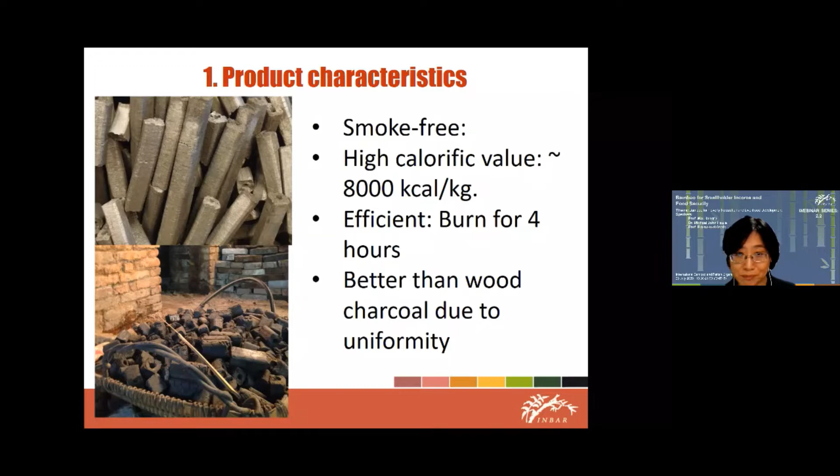Another source of raw material came from the secondary grade culms harvested from managed moso bamboo forest. The first grade culms were sent to pre-processing factories for end product processing, and the secondary ones were sent to charcoal factories or pulp making factories.

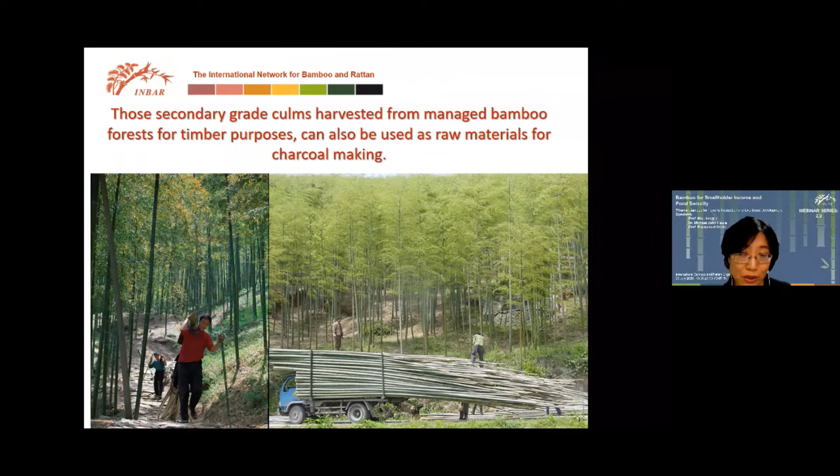So this is the process. First, we need to make all the raw material uniform in the same granule size. So first we do crushing and smashing, and then we got qualified bamboo powder, and then we further grind them and screen them, because there's some other stuff like sand and dirt mixed with the bamboo, so we need to screen them. Then after that, we do drying. There's a special drying machine, and then shaping.

This shaping is kind of an extruder. I will show you the picture. So the first picture I'm showing here is the...

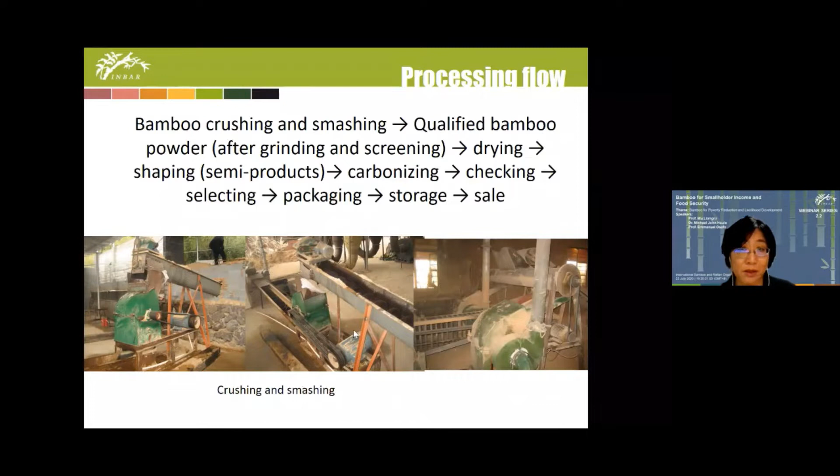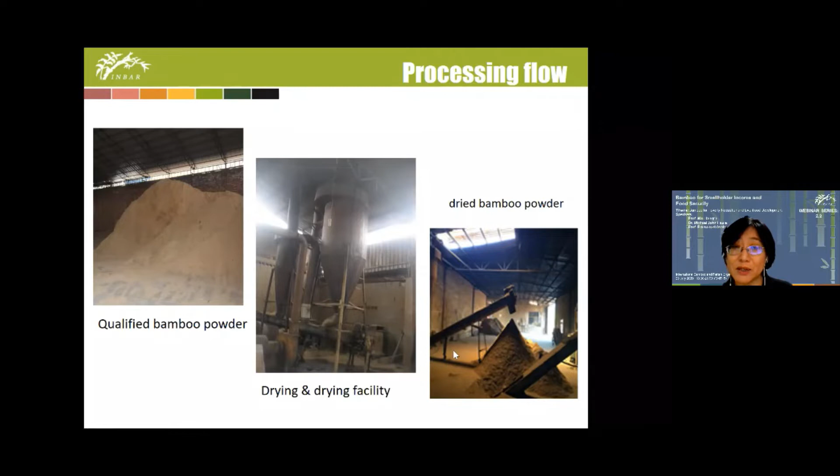crushing and smashing machine. Now you see there's a garage in the factory to store the powder, and this is the drying facility. After dried, the materials become like this, and they must be immediately put into the shaping machine. This is the shaping machine.

Basically, this technology is developed by Anji County according to their own conditions, and therefore this is a special machine. Of course, now this machine has been used in other provinces, but it's still managed by Anji people.

So you see this charcoal making, briquette charcoal making, the processing is quite different from others. The briquette is made before carbonizing rather than after carbonizing.

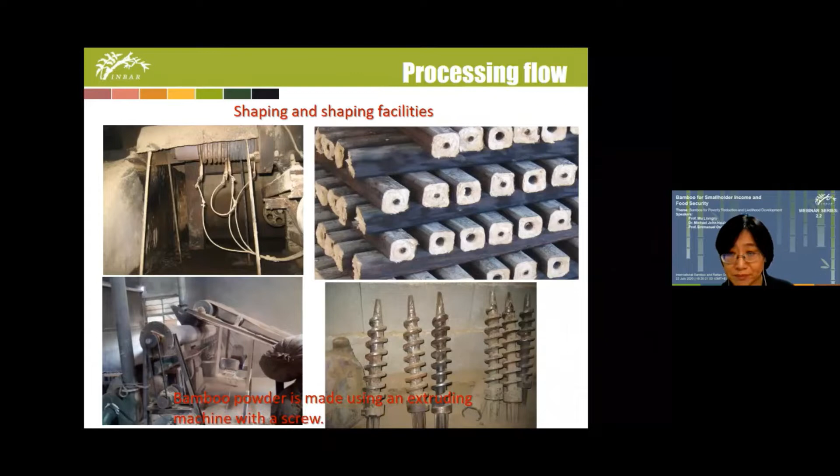So after the extruding machine, the briquettes then go to the carbonizer. Anji people prefer brick kilns, and this picture shows chained brick kilns. It's very long. This is a big production.

This kind of chained brick kiln can make sure the uniformity of the heat inside, so you can burn many charcoals at one time at the same pressure and same temperature at the same time. This saves costs and could make your products of higher quality and be profitable. So you see at the ceiling part, the ceiling is dome-like.

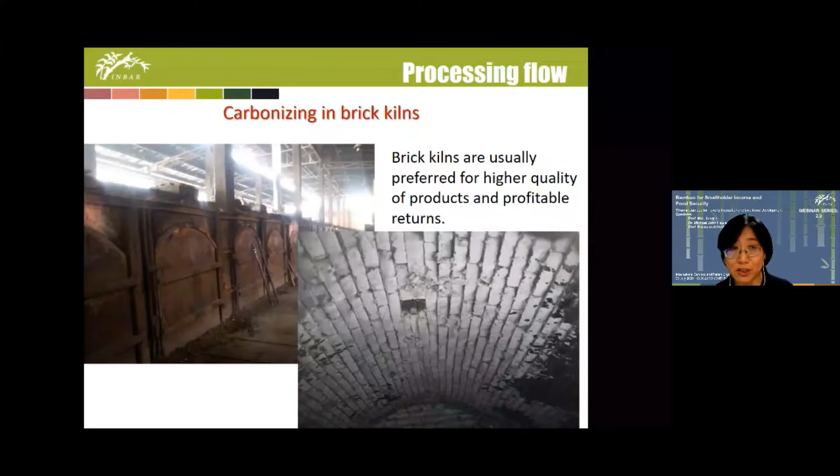There is a hole, and this hole is for the technician to observe the smoke coming out of the kiln, and then to decide when is the time to open the kiln, and what stage the carbonizing process has reached. So before you establish the project, you need to have a very experienced technician.

And the next step is cooling down. This picture just shows it's still burning, but it's better that the charcoal should be cooling down in the kiln rather than taking it out. So this picture is just to draw it out to let you see them.

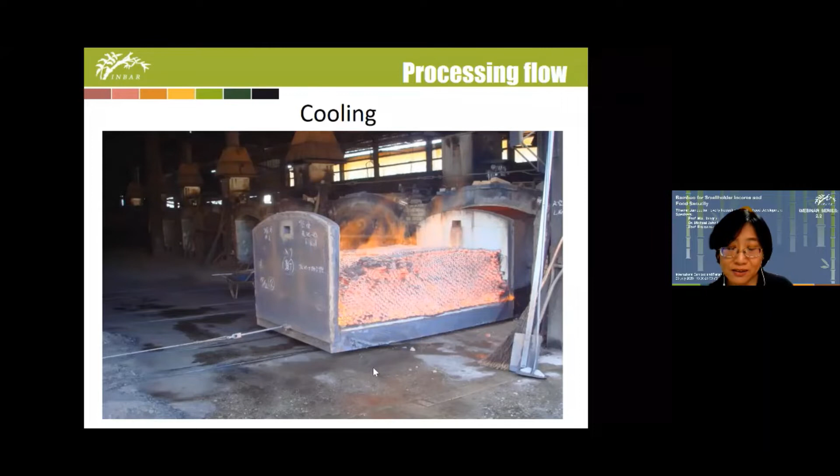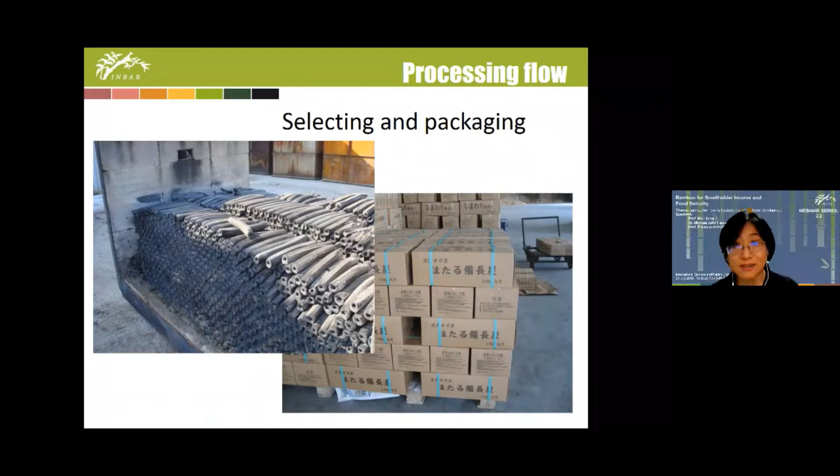So they need probably several days to cool down in the kiln itself, and you must avoid moisture. This is before packaging, and then you select and then pack. And then this goes to the container.

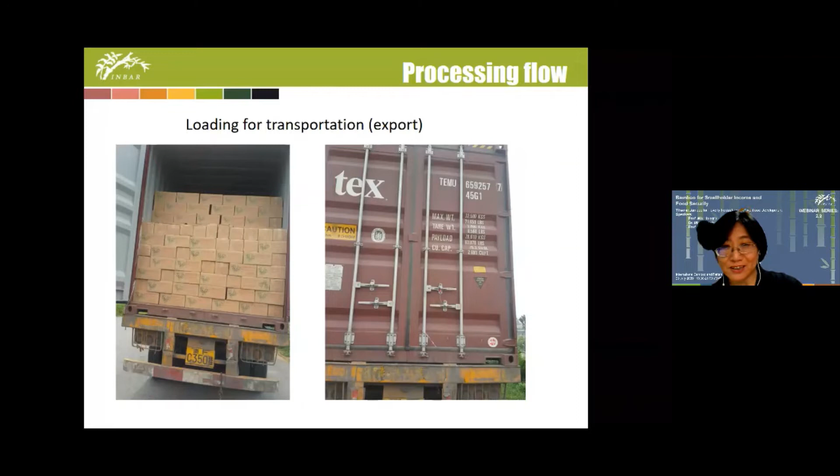So in Anji, each briquette charcoal making factory each day can produce 1 container. But it's not like that literally—the chained kiln will burn for 2 weeks, so it's just an average of 1 container per day, but actually it goes in cycles every 2 weeks. So this is the equipment list. This is only the key equipment.

You should have other auxiliary equipment for these products. First is the mill to do grinding, crushing, screening, and the drying and shaping equipment. The carbonization, what I said just now, is the kiln, and some auxiliary product recovery devices.

That means to keep the machines running, that's for debugging, this kind of devices. Then byproduct recycling devices means the bamboo vinegar. Bamboo vinegar is...

distillation of the bamboo charcoal coal tar. When you burn charcoal, there is a kind of coal tar condensed in the chimney, and a kind of oily liquid comes out. If you distill it, you get a special kind of chemical called vinegar, but this is not edible. This is for chemical factories, for daily chemical factories. They could be used for herbicide, pesticide, fertilizers, or cleansing chemicals.

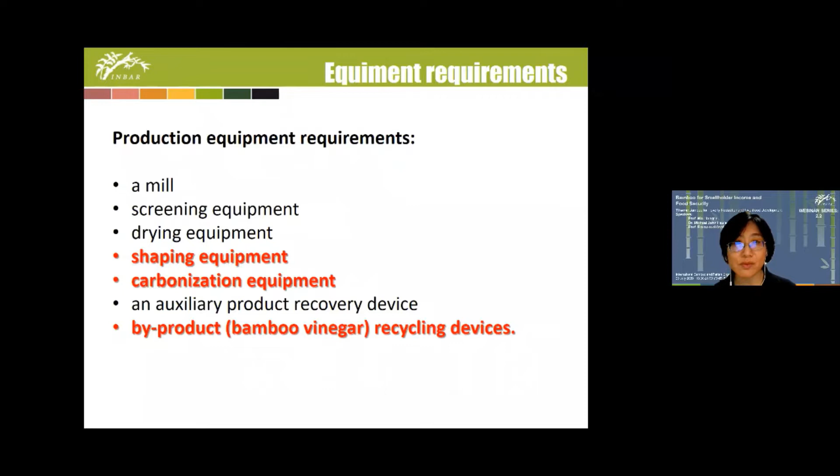And here is a calculation. This data was collected in 2015, so now, 5 years later, the situation is quite different in Anji. Actually, this kind of charcoal factory no longer exists in Anji—they were moved to west of China.

So the annual output is 3,000 tons—that means annual production is 3,000 tons of charcoal. And then the raw material to final product ratio is 6 to 1. So this raw material means fresh bamboo material that gets to the factory, meaning 6 tons of raw material can produce 1 ton of charcoal.

So that means the annual requirement for raw material is 18,000 tons. It goes to about 60 tons per day—60 tons per day. Equipment investment—this is only investment for equipment.

2.1 million yuan, which by exchange rate is about 300,000 US dollars. This does not include costs for renting the land, for the buildings, and for organizing production. For this size of production you need 40 employees, including 4 charcoal technicians. So the total sales revenue is 13.2 million yuan, about 1.9 million US dollars, and the profit is 1.2 million yuan, around 180,000 US dollars. We calculated that the recovery period, meaning when you can claim back the costs, is 6 years.

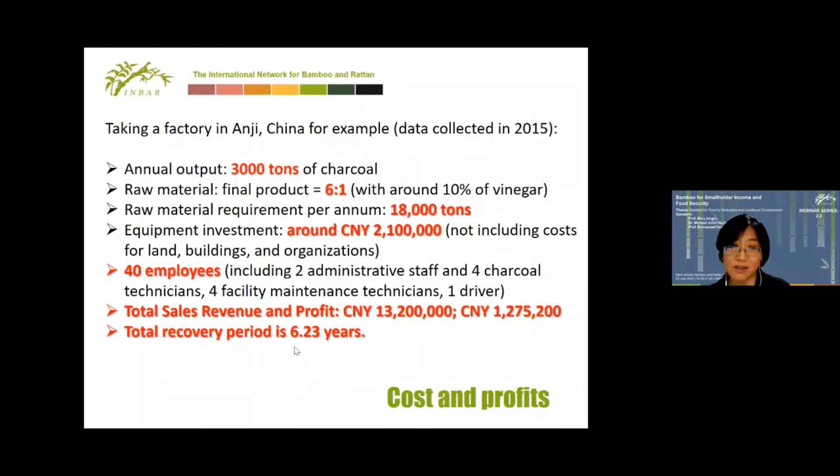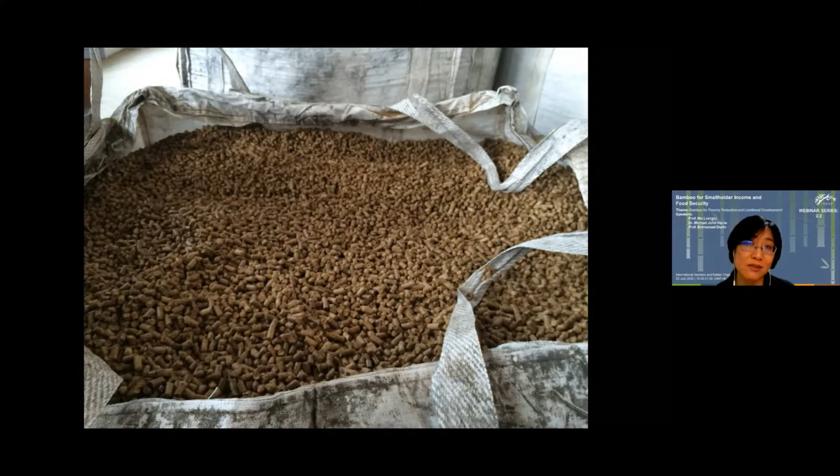So the next production unit is biomass pellet. This project we are introducing to you is unique in Anji County because this special technology was not used by other companies in China or in the world. It belongs to only one company, and this project was developed by the company together with the support of the government of Anji for 10 years.

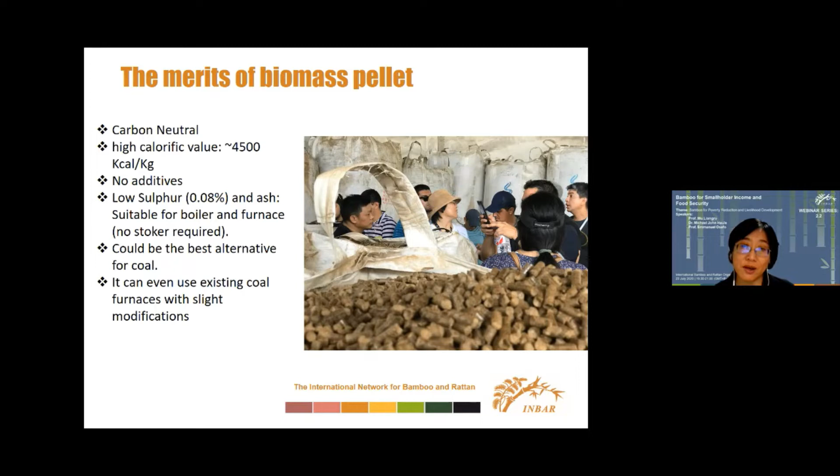Let's look at the product quality. It's carbon neutral, and it has a high calorific value of 4,500 kilocalories per kg, so it could be a very good replacement for coal. This fuel can be used for boilers and for power generation. Note there are no additives, no glues or other things for ignition — nothing else. This is purely made of bamboo. It has very low sulfur, and if you burn it, it generates very low sulfur and very low ash content, so it does not wear off the furnace or the boiler. It also has an automatic feeding system, so no stoker is needed. It could be the best alternative for coal, and it can use existing coal furnaces.

You can see this processing flow is quite simpler than that of charcoal. What's not simple is the technology itself, but the process is very simple: you directly use the raw materials, pulverize it, dry it, form it, then package and ship out.

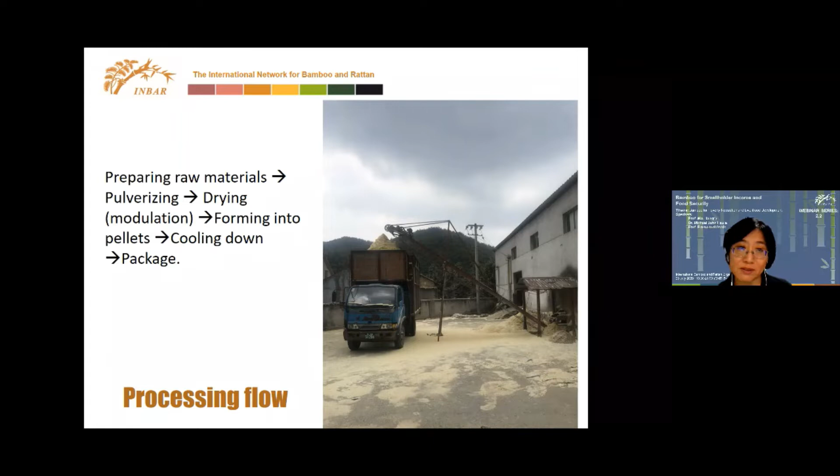You could see that the raw materials requirement is very high, so this factory doesn't even have a space for the raw materials — they have to be piled outside of the factory. You can use sawdust or use the raw raw materials.

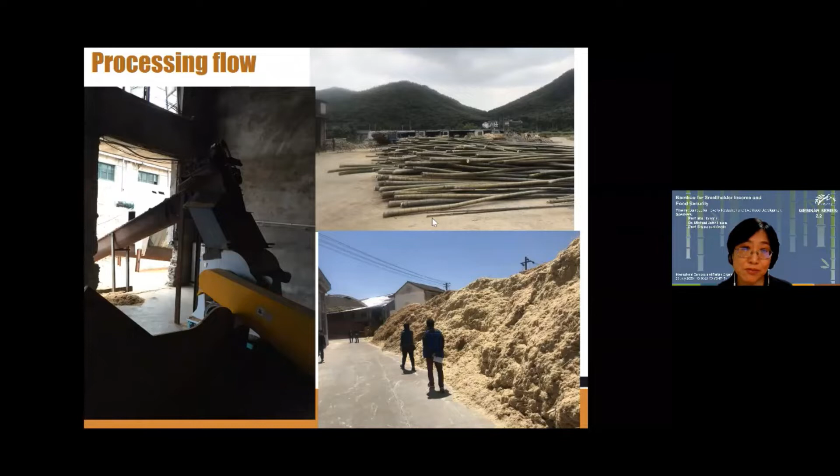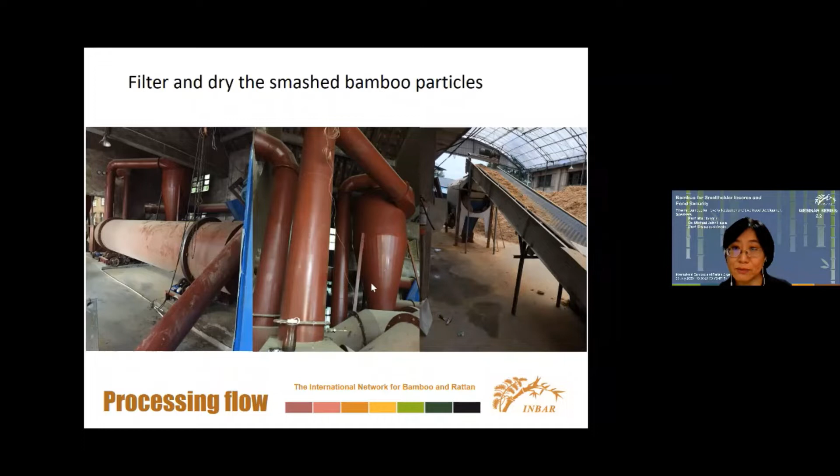You must first crush and smash them into particles, and then this is the drying facility — the drying cylinder, and this is also a drying machine. This is the transportation; after drying and screening, you get this.

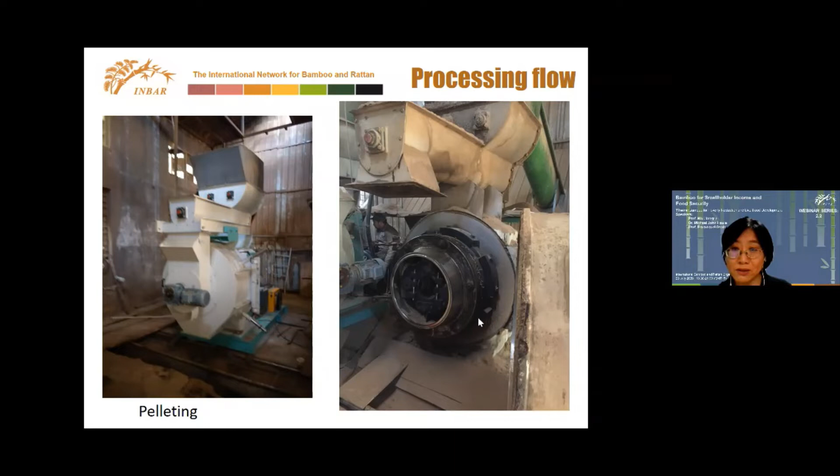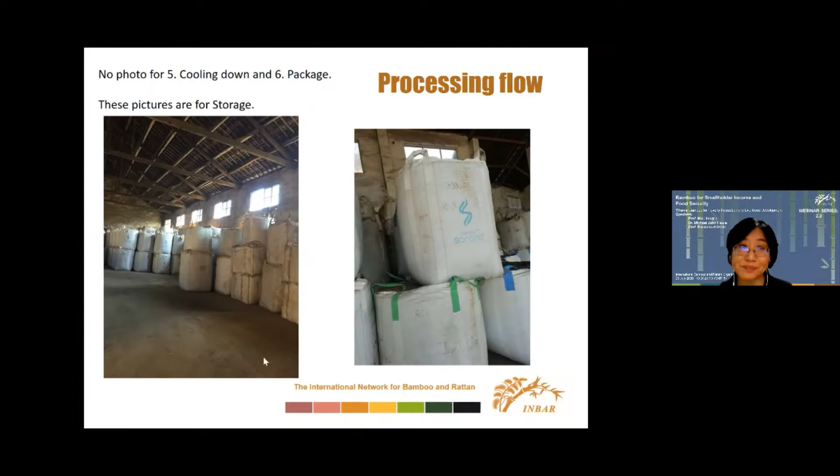So this is the core part — this is the pelletizer. When it's closed, and when it's opened, you could see the core part here. Let's have a closer look. Now our pellet comes out of these holes, and this is the final product. This is how you package, store, and then ship it out.

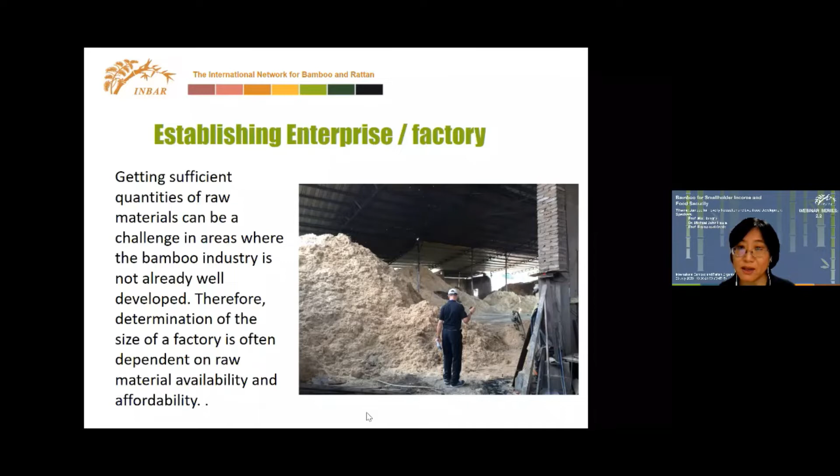So the difficult part is to plan and to establish such a factory or develop such a project. One key issue you must consider before establishing such a factory is that you must have sufficient raw material supply — not only sufficient but regular. This could be a challenge for areas where the bamboo industry is not well developed, so this is a key issue before your decision making.

The next several things you need to do before setting up such a project: first, with experts, investigate the local bamboo resources, the local existing processing industry, and the market condition. We also prefer that the local area already has a bamboo development plan which can accommodate this bamboo pelleting factory as part of it, maybe as the primary development part.

If not, we need to have a well-elaborated project plan for the pelleting machine. At the initial stage of implementation, we should have training for the technicians and management people. When the machine arrives, we should also have technical consultancy on the machine.

So I suggest that if you want to transfer this technology and introduce the equipment from China, you'd better choose to have a packaged service. That means we will help you plan the project, help do the training, ship the machine, and help with consultancy during the trial production period. This will make sure the project will not go off track and all problems could be resolved.

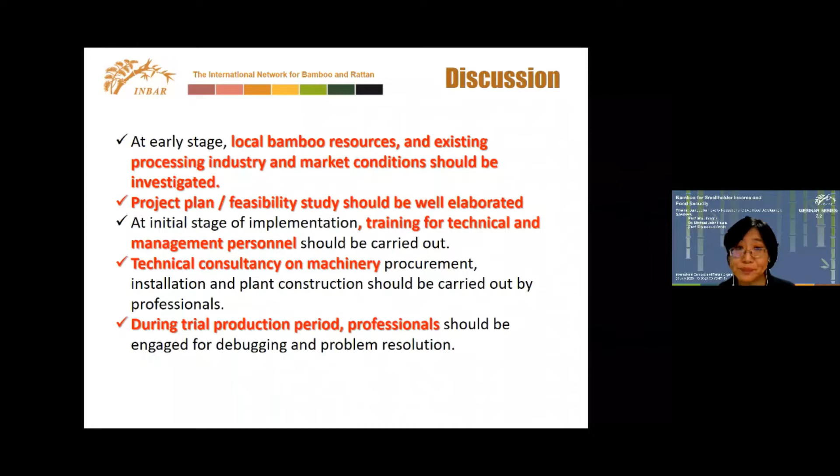Next, I would like to ask Mr. Xuan Tao to say something about their investigation into the market and the potential for the bamboo biomass pellet product. Thank you.

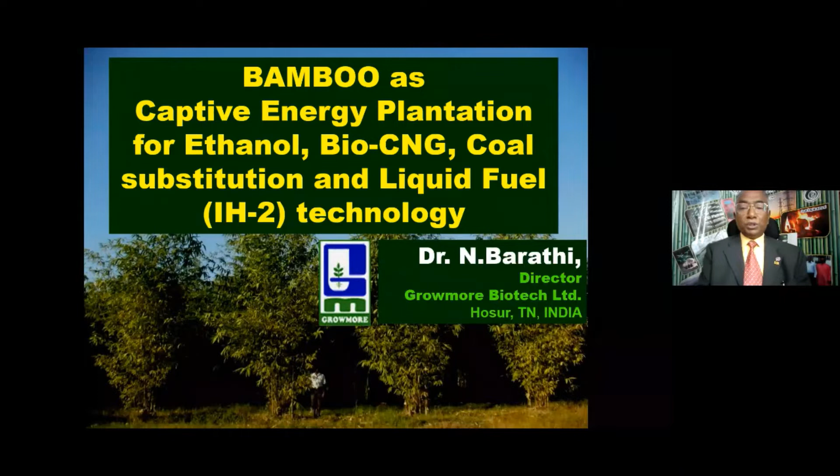I'll be talking on bamboo as a captive energy plantation for the production of ethanol, bio-CNG, coal substitution, and liquid fuel through IH2 technology. These are all renewable resources that can reduce global warming in a great way. I'll be talking on three topics: one is how bamboo is suitable for bioenergy, the next is what different energy products are being trialed and validated now, and the third is what are the constraints and opportunities available.

Let's take a look at how it's suitable. Bamboo burns very well, but normally bamboo is used as a high value product. Today, when bamboo is used as a product, it's sold at $1,500 per ton, whereas for energy it should be only $60. So the value of the bamboo should be low enough to convert into energy.

You cannot rely only on waste material, but bamboo is burnable. It has an excellent amount of carbon content - 48 to 52% is carbon sequestered from the atmosphere. Over and above that, it has fermentable sugar - 65% fermentable sugar of cellulose and hemicellulose - and that's what gets converted into ethanol or bio-CNG gas. It also has an energy value as such without doing anything: 4,000 kilocalories. What's very interesting is 1% ash content in that. Normally, when you look at coal, ash content varies from 10%, 15%, 20%, up to 30%. This is the one with the least amount.

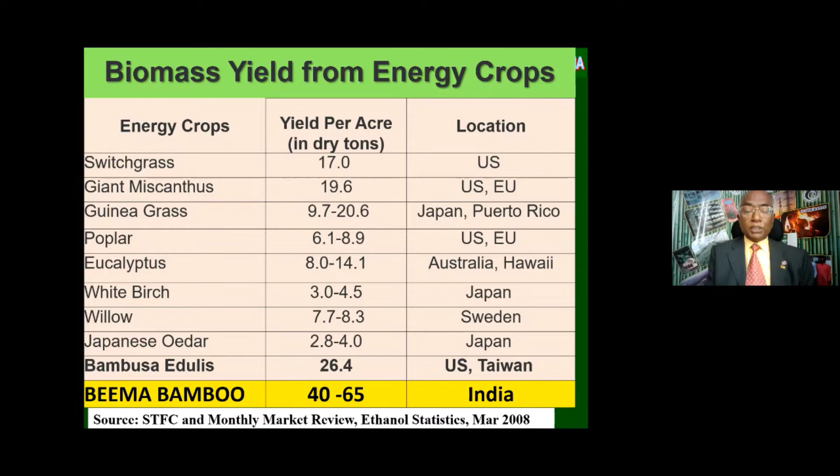What happened in India - I could see a case history where the cost of the biomass was only 800 rupees a ton around 8 years back. Everybody went for energy through bamboo biomass, then it went up to 2,500, 3,500, and now it's sitting at 4,500 rupees. But at this cost, we cannot make energy out of the bamboo.

So what we did, we made it deliver the technology by which we can do this and reduce the cost to 1,500 rupees a ton. And that's where the bamboos come into picture. Bamboo, when you do it as a captive energy plantation, every factory, if they're going to grow on their own, that cost is only 1,500 rupees, hardly around $25 per ton.

And the bamboo, when you look at this, their moisture content is 12 to 15% when it is dry. Ash content is only 0.4 to 1%. Volatile matter is excellent for burning, and the fixed carbon is low. The sulfur is least, and the calorific value is 4,050 calories.

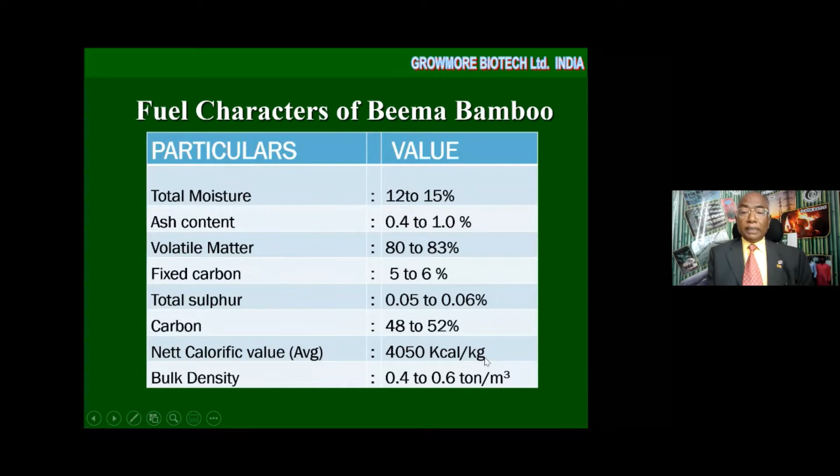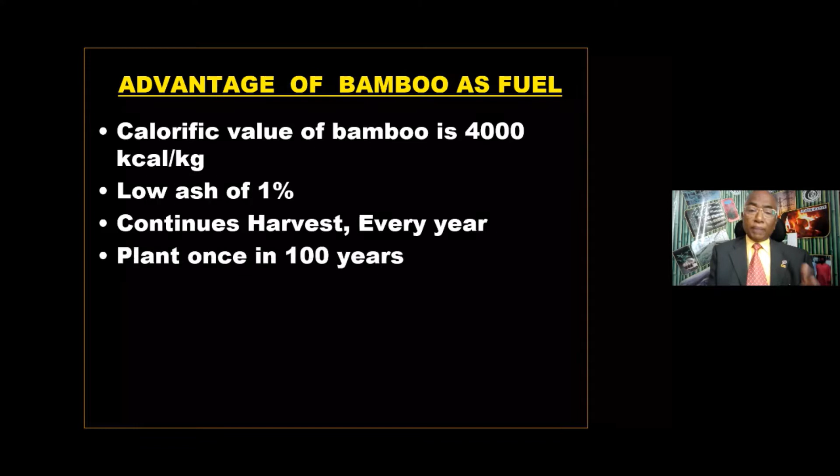Then the bamboo has got several advantages as a fuel: high calorie value, low ash content, and can be continuously harvested. Once planted, it can grow for several hundred years. If the bamboo is sterile, species like Bambusa balcooa and Bambusa vulgaris can be continuously grown without replanting - planted once in 100 years, it can keep on growing forever. All other energy crops need to be replaced at a particular time. Bamboo is a grass, because of which the tar content is very low, which is one of the interferences in most boilers.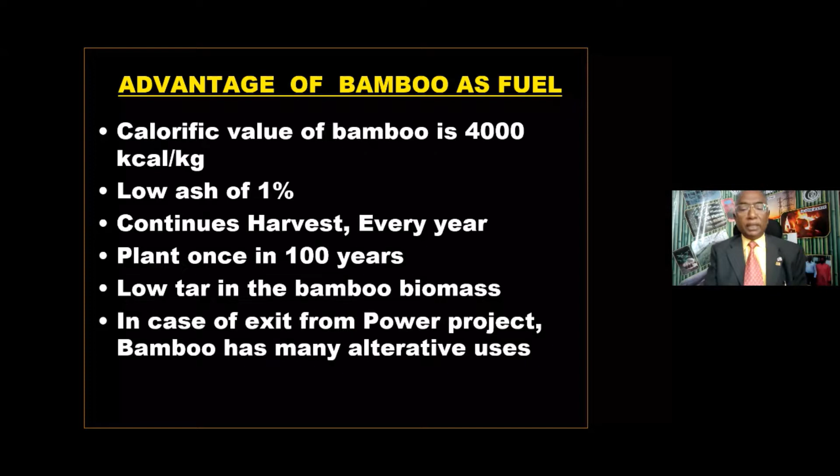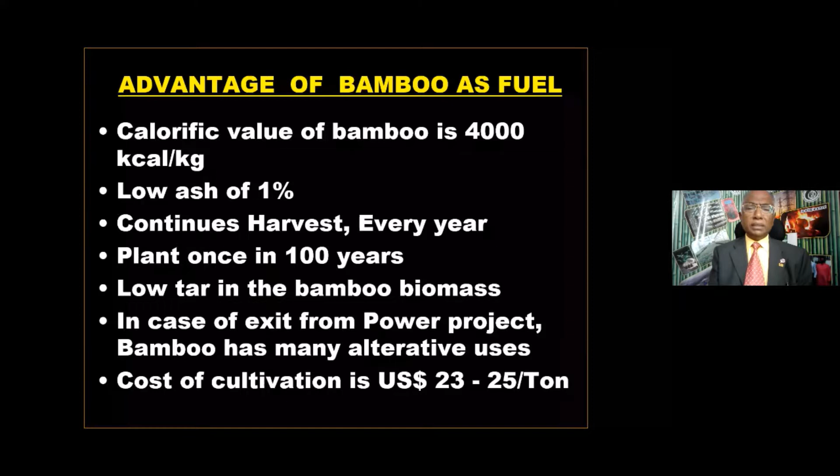In case the power is going to be excess, it could be converted into so many alternative products. It's not that only energy should be done with this. And what is very attractive is the cost, it's only $23 to $25 at the least. This is what is going to bring in a lot of impact.

Let's see what energy products are being trialed and validated now. Bamboo as an energy plantation, when you grow them, is mainly for switching over from fossil fuel to renewable energy. The first is coal getting replaced - 1 ton of coal at 4,000 kilocalories getting replaced with bamboo. The cement industry is doing it, the iron ore industry is doing it. All these people have now started working on it.

The bio-CNG gas, 4 kilos of bamboo is able to get converted into 1 kilogram of CNG gas, which is a beautiful product for the vehicle to run. Similarly biofuel - the oil, through IH² technology, today we are able to convert them into petrol, diesel or jet fuel. 4 kilos of bamboo is going to produce 1 liter of petrol or diesel.

And electricity - every kilogram of bamboo is producing electricity. Similarly bioethanol, the cellulose, which is 65%, when it is digested, is able to get converted into ethanol. Again 4 kilos of bamboo is able to get converted into 1 liter of ethanol. That is the way bamboo is able to get converted.

Bamboo, like this, is able to produce electricity. 1 kilogram is able to produce 1 kilowatt, which means 200 acres, 80 hectares, is going to produce 1 megawatt. One of our panelists is going to talk more on this, and the cost is going to be the least, $0.04 per kilowatt hour. Now let me look at the ethanol.

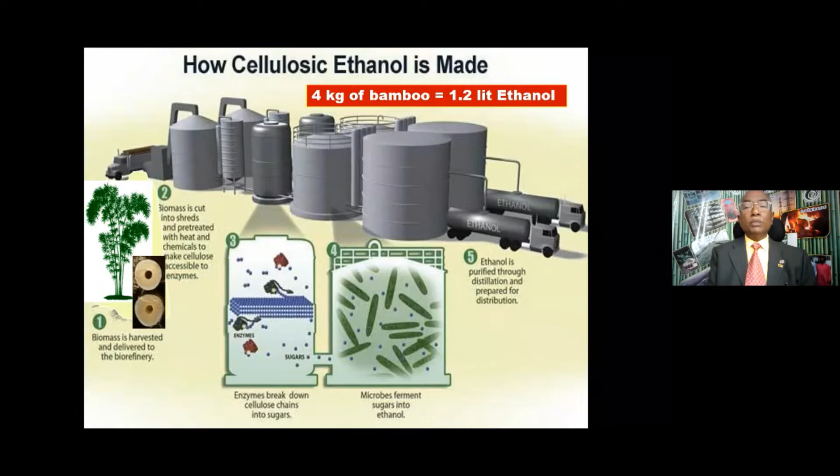Now look at this: 4 kg of bamboo is able to make 1 kilogram ethanol or 1.2 liters of ethanol. Look at that - 1 acre of bamboo is able to produce 10,000 liters of ethanol, extremely high. A cultivated bamboo can do that.

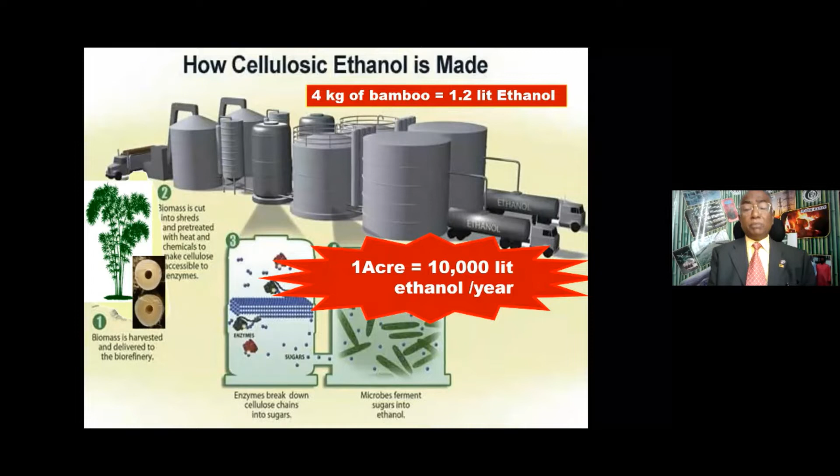Today we have sugarcane as a choice for ethanol, which is able to produce ethanol from the molasses of 40 tons of sugarcane. In the US and other countries where sugarcane cannot be grown, starch is there through the cob, maize, and that is converted into sugar into ethanol. Bamboo does not have sugar, does not have starch, but it's got a lot of cellulose, which is first pre-treated, converted into starch into sugar into ethanol. I mean, this is science. Industry wants to do it, they want to see what is the efficiency. Now, on efficiency of operation, you look at sugarcane is able to give 500 liters from 40 tons of sugarcane.

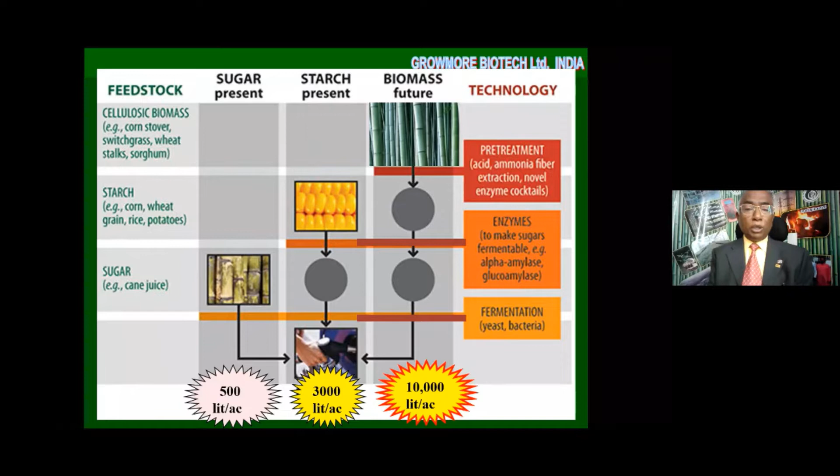Even if you convert the entire juice, you'll be able to make only 2,000 liters per acre per year from sugarcane. Maize, with 3 crops, gives 3,000 liters, better than sugarcane, but it's food versus fuel. Bamboo can give you 10,000 liters per acre, for which you don't need to replant at all. Sugarcane has to be replanted every 1 or 2 years, whereas maize has to be replanted 3 times a year. Bamboo, plant once, and you can keep on harvesting.

Now, taking this forward, wood-to-oil conversion is much more sophisticated. A technology called IH² technology has come into the picture, where bamboo biomass is taken through hydropyrolysis. It's converted into biochar and a gas. The gas is further reacted through a reactor, which is able to convert it into gasoline, jet fuel, diesel, and what emission comes out is converted into hydrogen, again used for hydrogenation. This particular technology is patented, developed by Shell, and it's going to go in a very big way.

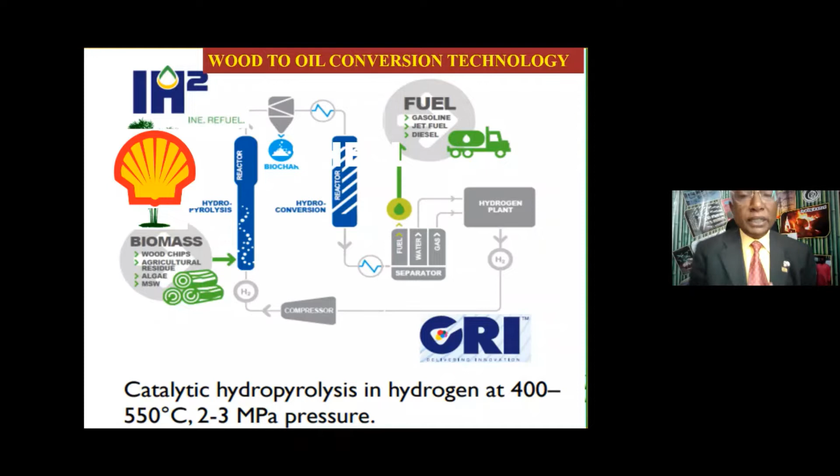Now, all these are potential technologies available for bamboo to be explored if bamboo can be grown as an energy crop. Now, CNG gas.

There is a company called Agrogas in Pune that has developed this technology. You don't need to wait for a week like in ethanol. The bamboo is taken in the reactor, placed for 1 day, 24 hours, digested, and it gets converted into gas. That gas is filtered for carbon dioxide, carbon monoxide, sulfur dioxide, and it is put in the cylinder as methane. In front of this, they have the bunk supplying the gas to auto rickshaws, cars, and bus vehicles. It's been going on for the last 2 years. They can use any agriculture product, including bamboo - that's the best part of bamboo.

When you're using it 24 hours, 4 kg of bamboo makes 1 kg of gas, and 300 or maximum 350 acres are needed to make 5,000 kg of gas. A bunk on the national highway can give you continuous gas. This is one of the breakthrough technologies.

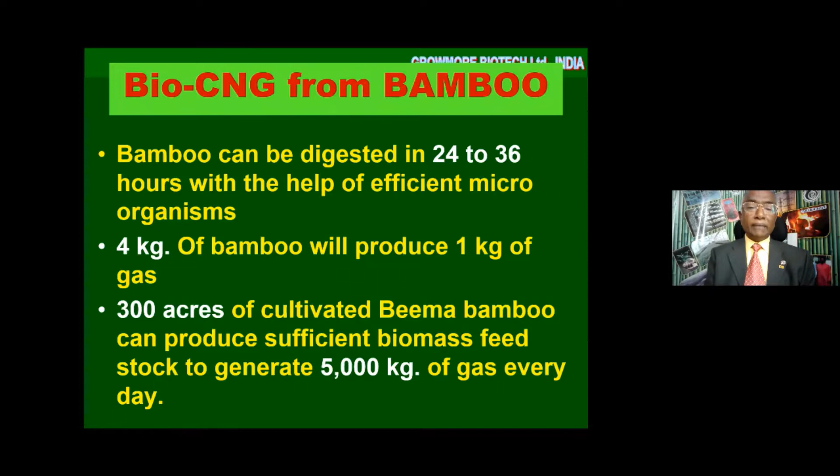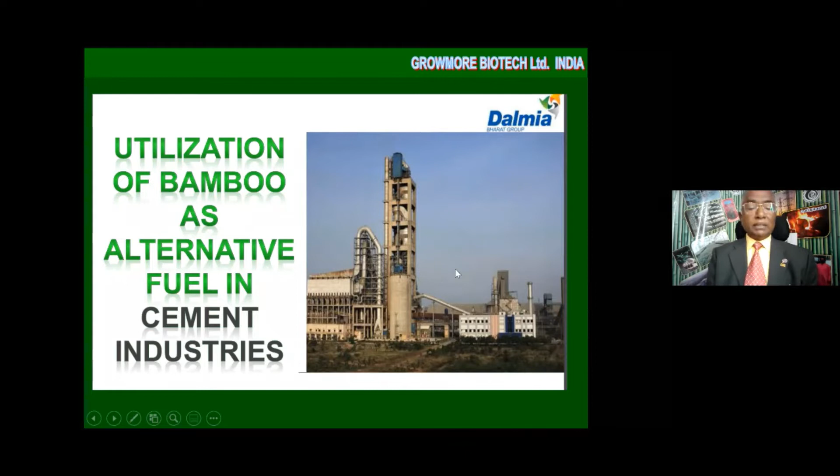But let's not go too high tech. Just replace coal in cement industries. We're able to show people that bamboo can do that. Dalmia's in India has started doing it, and Ultratech is going on with 50 different factories in India. The carbon footprint is very high for cement - the international average is 612 kgs of carbon footprint, the Indian average is 579, and the Dalmia group is only 493. Now they have units in Northeast where bamboo is abundant, and all the waste has been used, reducing it to 330 - 50% below the global average.

They don't stop with this. They are working towards zero carbon emission, which they're going to achieve in another 10 years, for which the work has started now. Bamboo is going to be the main commodity for this. They're going to cultivate bamboo as an energy crop.

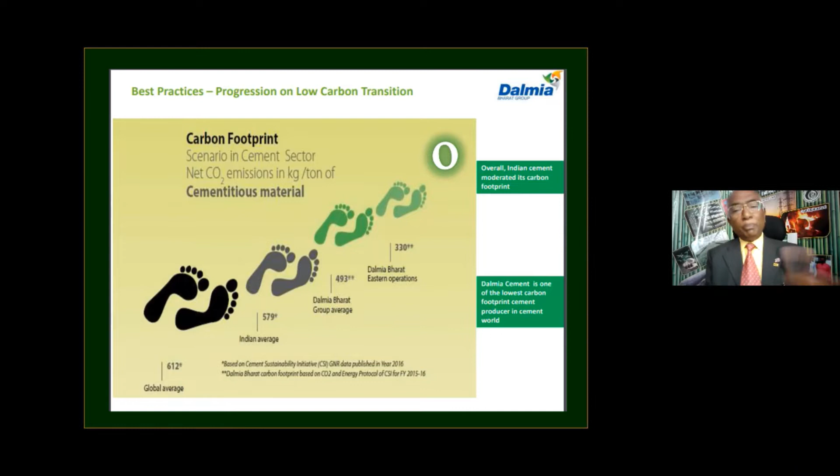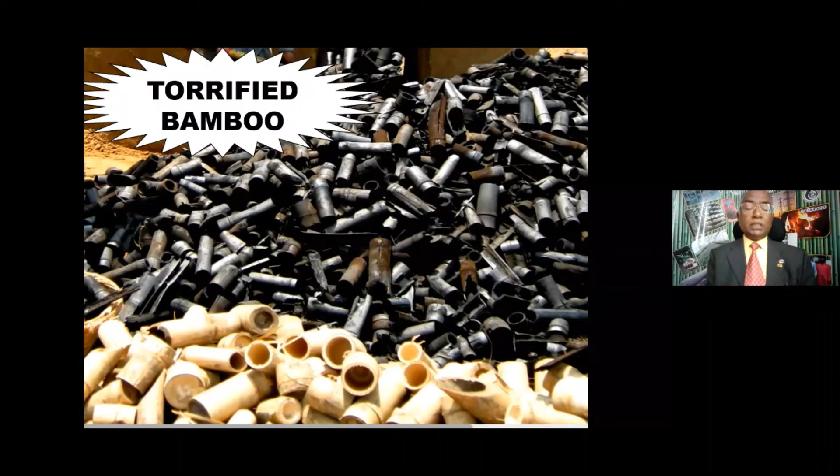So to replace coal, if you look at it, bamboo could replace coal directly, or could be converted into coal, or you can torrefy the bamboo. Torrefied bamboo has higher energy, is brittle, and can be mixed along with coal very easily. Now, I looked at the market - the market is 820 million tons of coal being used in India.

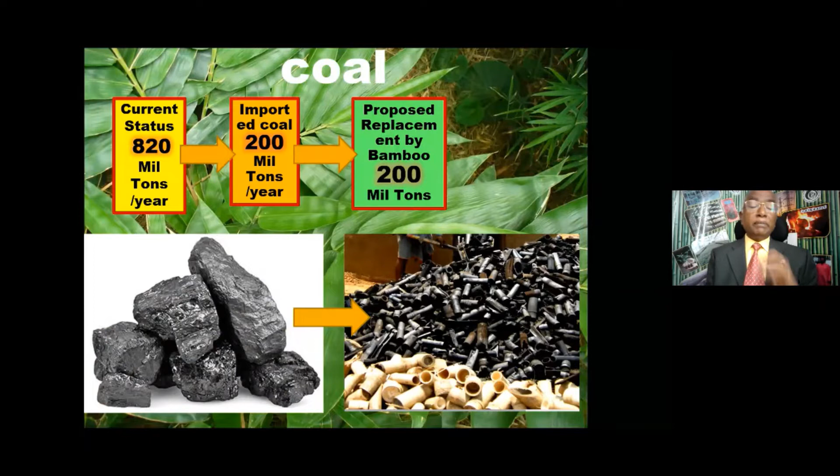We are importing 200 million tons of coal every year, which can be replaced by 200 million tons of bamboo. Everyone used to ask me, where is the market for bamboo? Now look at this market. If you're cultivating beautifully, wonderfully, 200 million tons needs 5 million acres of plantations. Today sugarcane is cultivated as a cash crop only in 5 million hectares, but for bamboo, just for coal replacement alone, you need much more than that.

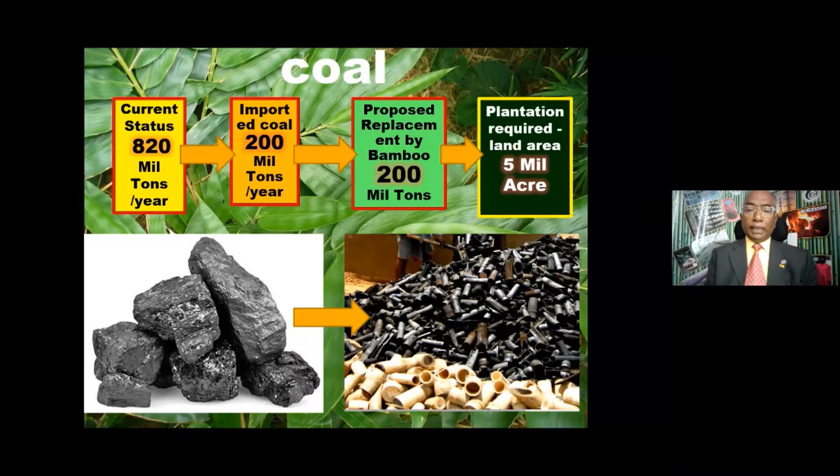You might ask, what market is available? So the total bamboo requirement: we calculated 136 million tons for bio-CNG in India, 908 million tons to replace coal, 350 million tons for electricity, 804 million tons for biofuel, and 190 million tons for bioethanol. All put together, almost 2,400 million tons, which amounts to 60 million acres.

Let's say in another 20 years you're going to achieve this. Believe me, sugarcane today occupies somewhere around 14 million acres, and this is 5 times more than that. That is the demand, and that's going to be the crop of the future. Bamboo is going to be the crop of the future. Believe me, bamboo is the next disruptive technology to dominate the future for the energy sector. Huge quantities are needed, and nobody can satisfy the requirement. We never believed when the cell phone came into picture.

Now, what are the constraints and opportunities available to do this? One is how bamboo is grown today. In the forest, it's about 0.5 tons per acre, whereas when a farmer grows it, he's able to get 4 to 8 tons per acre. But this is not the broiler way of growing chicken. If bamboo is grown like a broiler chicken, through precision farming, it will be able to produce 40 tons per acre—this is like the Jersey cow, not the wild cow.

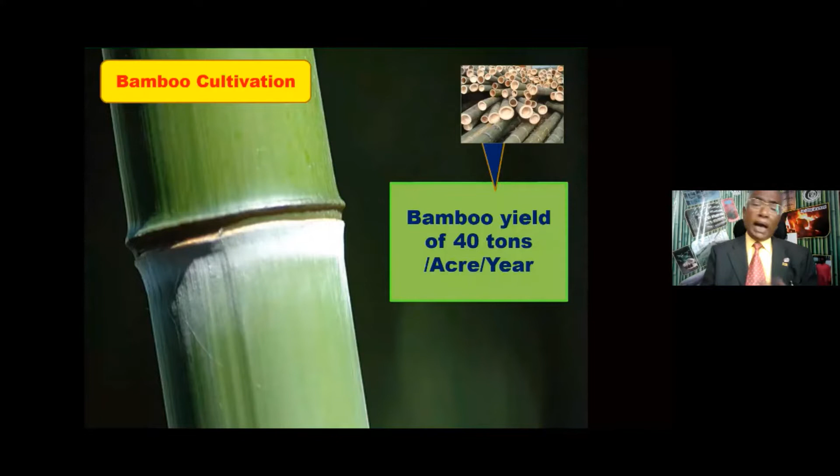Among them, there are a lot of clones. I've been working on clone development, and I developed one clone called Beema Bamboo, which is doing wonderfully well for energy. It can be used for construction as well.

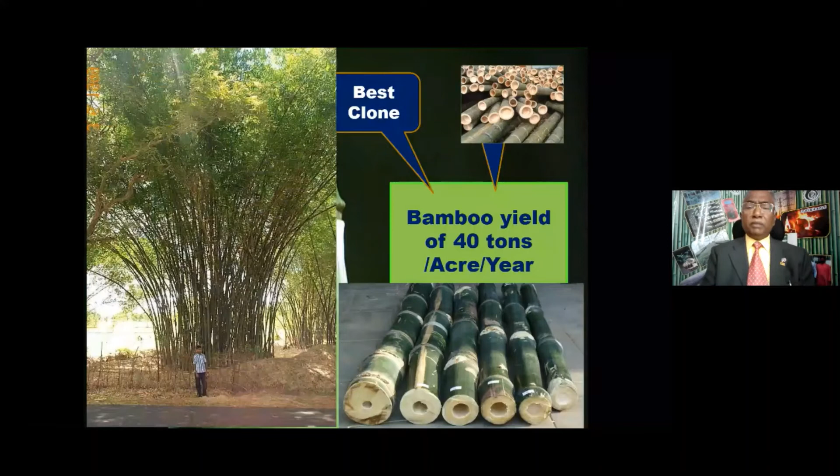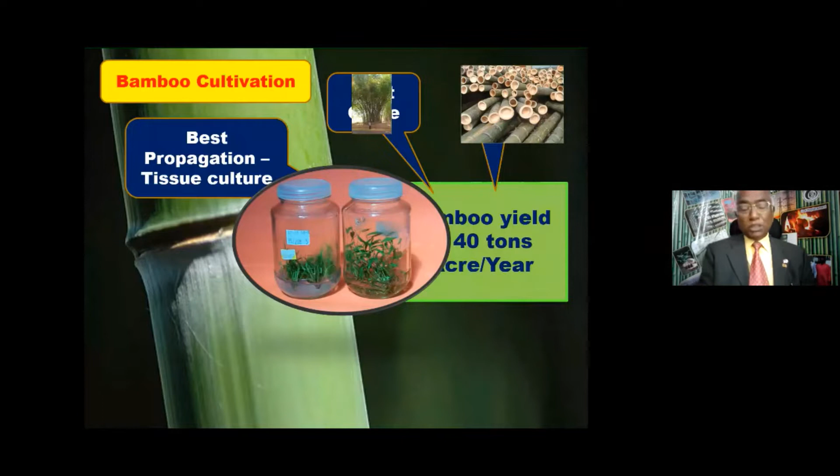But how do you get good planting material? By seeds, you get a lot of variation. By cutting, you carry forward some diseases and the vigor is not there. Tissue culture is the best method, which I developed—as Dr. Durai said, he's been working for 40 years in tissue culture. I've been working in tissue culture of bamboo for the last 20 years, and for the last 15 years I've been commercially producing plants in large quantities—around 100,000 plants are manufactured every day. It's no more research.

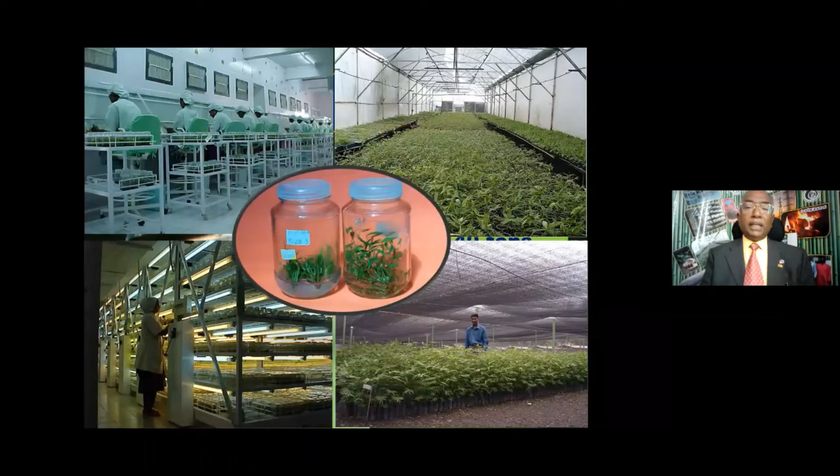Planting—how do you plant them? It's done in 8 feet, 12 feet, 8 feet, 12 feet rows, and the plants are planted every 4 feet, continuously. After that it becomes a wall of bamboo, not a tree of bamboo. With 1,000 plants per acre, harvest starts after 2.5 years, and the aim is 40 to 50 tons per acre. Let's see how it's planted.

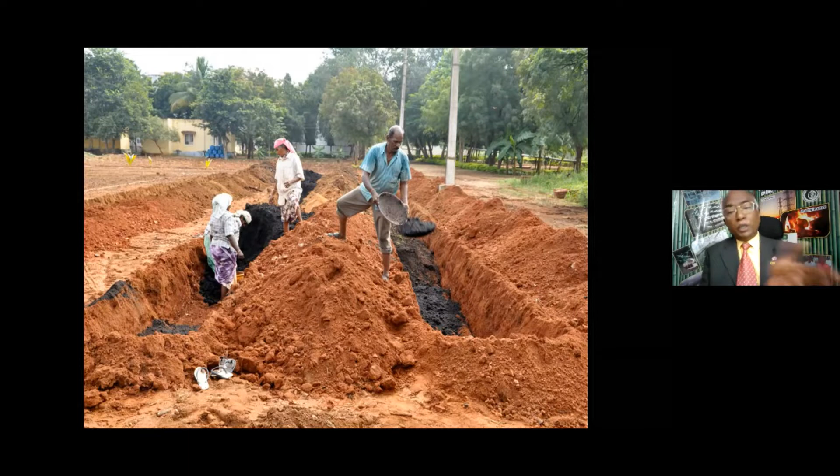No more pit planting—we're used to planting in pits. Now, to grow bamboo in a row, it has to be planted in a continuous trench. I've spent 15 years of research developing this method, where trenches are made, manure is put inside, topsoil is covered, and planting is done in that. The best agronomy is needed, with the right amount of irrigation and nutrients applied through the fertigation system. Let's see how it's done—first day of the plant getting planted, and in 2 months' time, they all line up.

It's not a very high rainfall area, 600 millimeters rainfall, but the drip line is able to feed them with 5 liters per day, starting with here. And then you see them, they have 4 months' time, shoots up the growth. And the 12 feet gap is slowly getting reduced.

Another 4 months from now, it's 8 months. The bamboo, the 12 feet is reduced to 2 feet now. The leaves have become bigger. It has went and touched the manure. It's able to make a compound wall of bamboo.

And another 4 months, 12 months that is, completely covered. No sunlight is wasted. It's a green solar panel completely covered. The whole 4,000 square meter, 1 acre is covered, and they are able to really do the photosynthesis. The plant is ready for harvest in 2.5 years' time.

And it's harvested manually, or it could be mechanically harvested. And all the plants have got solid biomass. This solid biomass is able to either clear cut harvest, completely cut, then you can cut again after 2 years. Many people think that it cannot be cut like this. We have done so much amount of work now, it's possible.

You see them, in 2 weeks time, it's coming back. Another 4 weeks from now, it's shooting up so much. Another 6 weeks, totally it is ready. So all the cut branches are there, leaves are there, still started growing. Bamboos like a cockroach. They can come very well anywhere.

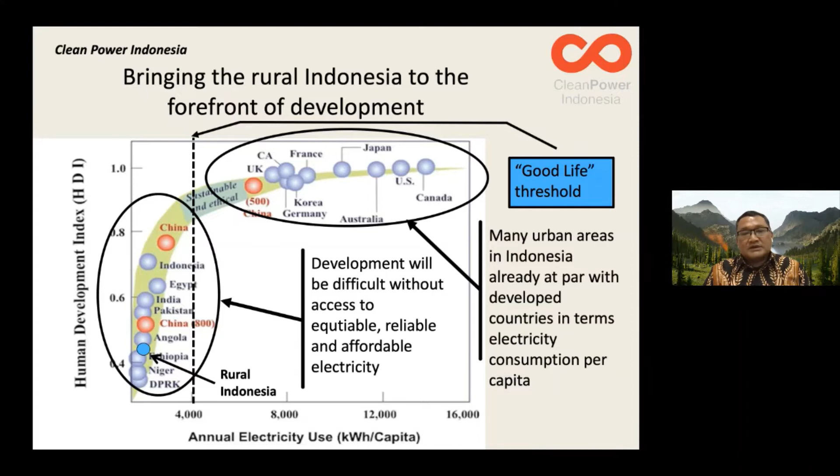Mentawai itself is actually famous all over the world. The late Paul Walker came frequently to surf, and also Chris Hemsworth, another Hollywood star who plays in the Avengers, came too. All these surfers around the world came to Mentawai every year because they have the longest surfing season and many surfing spots.

So this is a very famous area, but unfortunately many of the people still live in the dark. When they don't have access to grid electricity, they couldn't develop their community, and if they have electricity, it's very expensive. They pay around 10 to 20 times higher than people living in big cities like Jakarta or other cities on the big islands. This happens in many communities, especially on small islands like Mentawai.

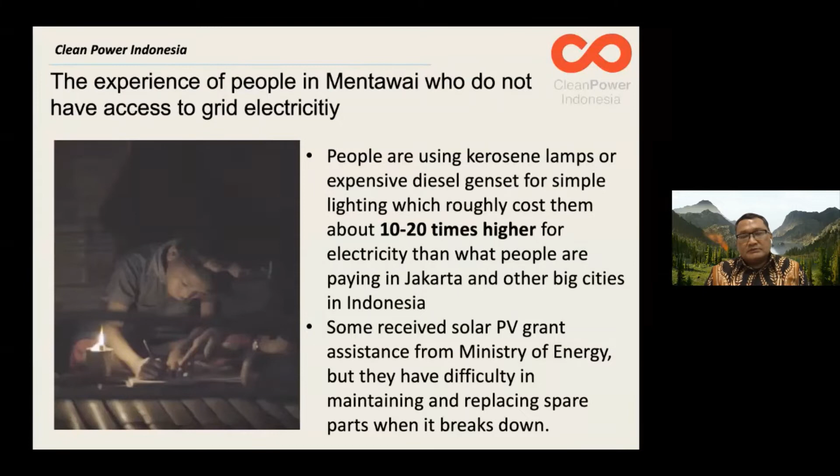Some receive solar PV, a grant assistance from the central government, but they couldn't maintain it properly. So within 2-3 years, they go back to dark because they don't have money to replace and maintain the system.

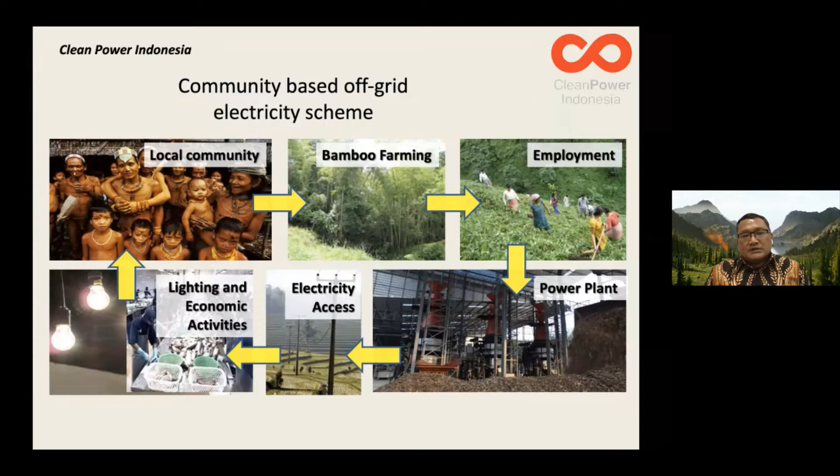So what we propose is that the community keep planting the bamboo, and we also give them more seedlings to plant, and they use it for job creation. All the households participate and become producers of the biomass. They supply to the power plant, and the power plant gives back electricity to the community, who use the electricity as a means of development. So there are three parties working together in this scheme.

One is the community, that's number one. Number two is the power producer, which is Clean Power Indonesia and partners. Number three is PLN, the state-owned utility company in Indonesia, which has a monopoly all over the country. They are the only company in Indonesia that can distribute power to the community, and they become our off-taker.

Because it's state-owned, the project is bankable, backed by a long-term government contract. And because the government comes in as distributor, they can distribute at a subsidized tariff, so the community pays very low tariff, around 3 cents per kilowatt hour. The community sells bamboo to the power plant, and pays the electricity bill from the proceeds of selling the bamboo. In this loop, they get electricity almost for free because they don't need to pay out of pocket.

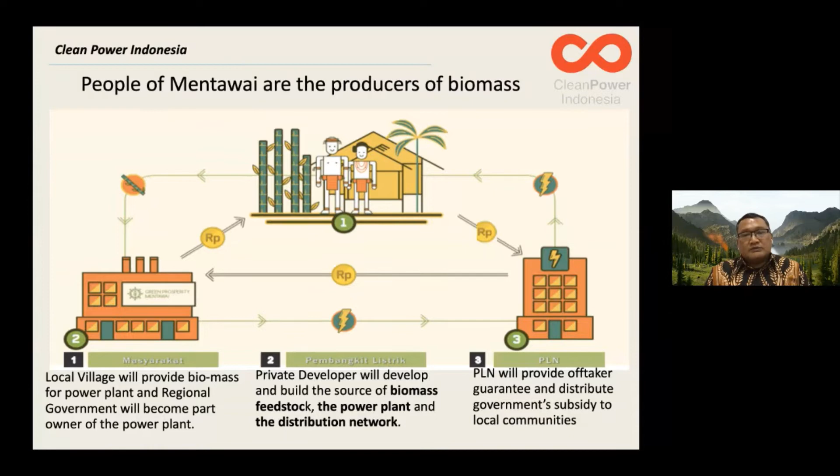It's not only that the bamboo can produce electricity for the community, but the byproduct is used for cooking fuel to replace propane, LPG, or even firewood. So they have smokeless fuel for cooking, which is much healthier for them. And the excess heat can be used for drying crops. So it helps the community have reliable power, reliable cooking fuel, and reliable heat for crop drying.

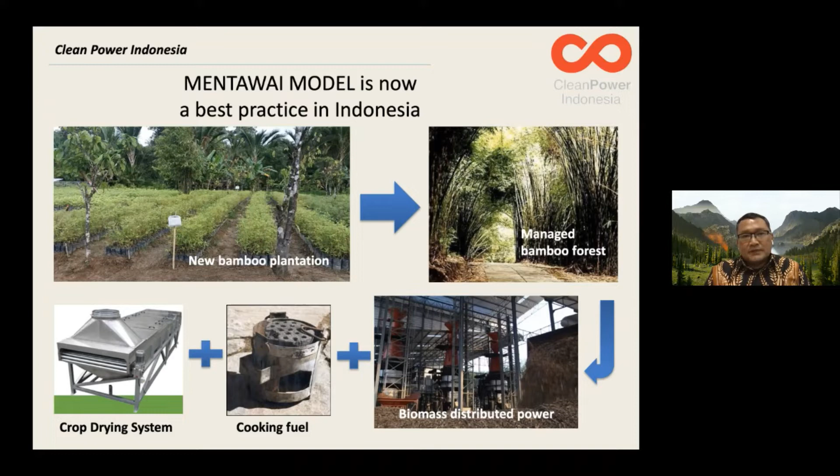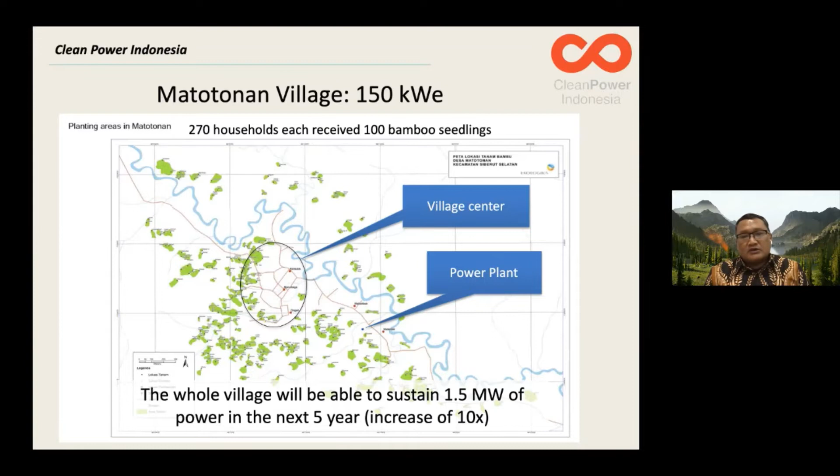The challenge of bringing electricity to remote villages in Indonesia is enormous. In this particular case, we had to mobilize equipment with helicopters, even for small capacity, because there is no road into this village and access through the river is not reliable. This is funded by a grant from the US government, so it's not a case that can be copied commercially, but it's a proof of concept that the community, the business, and the state can work together to bring reliable and equitable electricity.

The next project we are doing in the eastern part of Indonesia is solely a commercial project with project financing. I will talk about that later in the slide.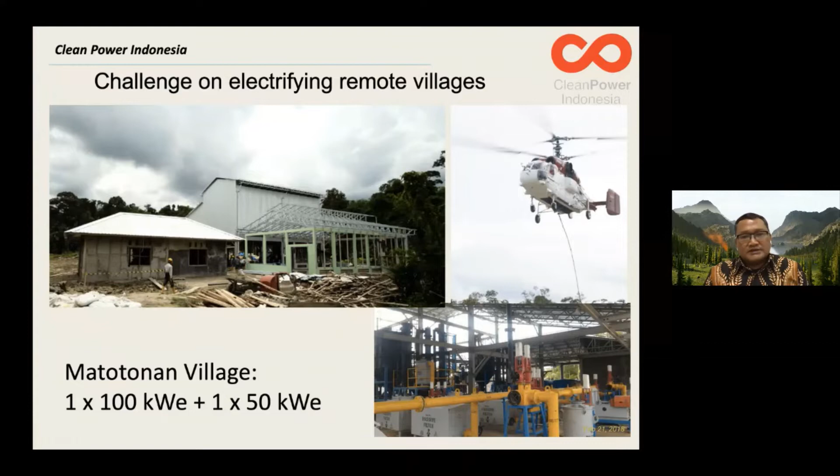One particular power plant is next to the mangrove, so we cannot pollute the area or discharge wastewater into it. This is a good system that can be placed in a very sensitive habitat, as it doesn't pollute the water or the air surrounding the power plant.

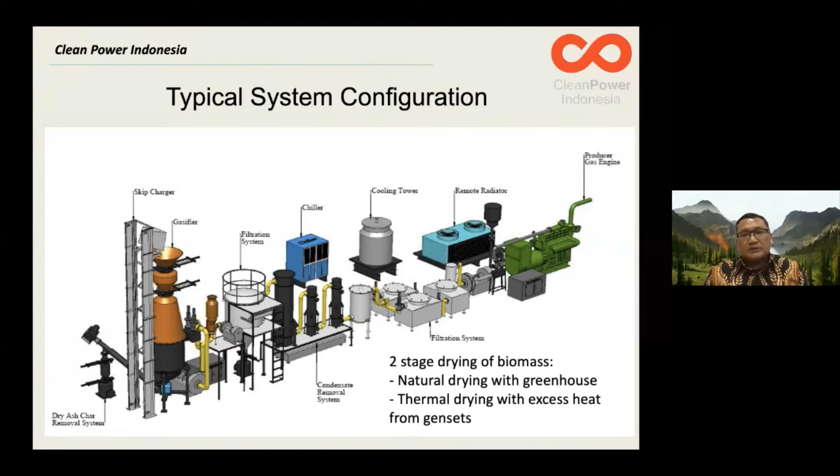So how do we bring in the operators? We train the locals.

So we have the locals recruited, and we train them for more than a year, and now they become operators for the power plant. We have 3 of these power plants in Mentawai already, and we plan to replicate to 5 more locations in the same island. And in the eastern part of Indonesia, we are starting with 10 locations.

So this is a distributed power plant. The advantage of having a distributed power plant is to have the logistics much easier to handle. Typically a 500 kilowatt to 2.5 megawatt system will require around 5 to 10 kilometer radius of bamboo supply.

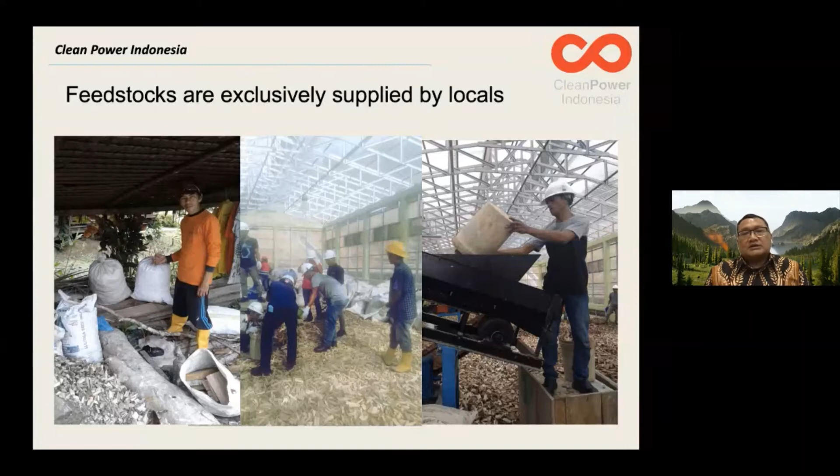Feedstock is exclusively supplied by locals. There is no biomass supplied from other communities or even from other islands. So this is going to be a self-reliant community. They have the source of energy within their village, they have the power plant within the village, and jobs are created for the local population as well.

The good thing about having bamboo planted surrounding the village as the primary source of energy is that this is a good tool to empower women and indigenous people. Because bamboo doesn't require special tools, women can work without leaving their home - they cut the bamboo, they chip the bamboo, and they even transport the bamboo by foot. They get money and pay for electricity from that.

So this is the power plant, the first power plant that has been lit up since April 2018. I believe this is the first community-based bamboo biomass power plant in the world because it has the bamboo forest surrounding it, and the power plant supplies electricity back to the community. It's an isolated grid, and the whole community participates. We're quite proud that we claim the title to be the first community-based bamboo biomass power plant in the world.

But we certainly don't want to sit on our laurels. We want to replicate this all over Indonesia. And since then, the people of Matotonan village - that's the name of the village - have had access to reliable, equitable, affordable, and sustainable electricity for years to come.

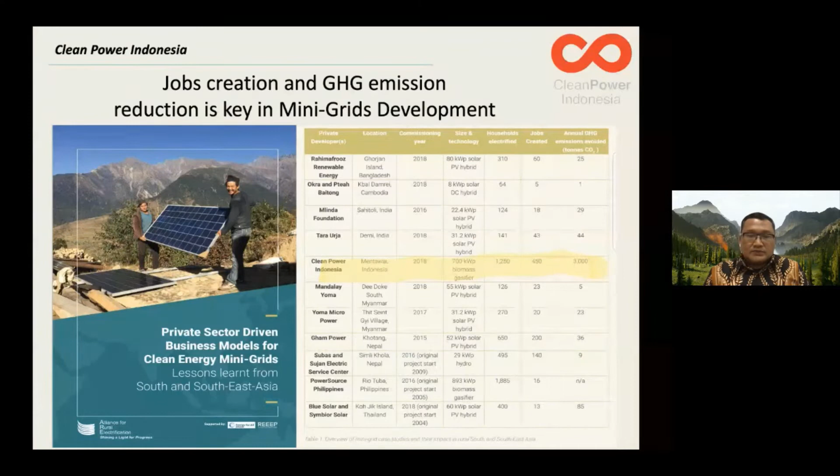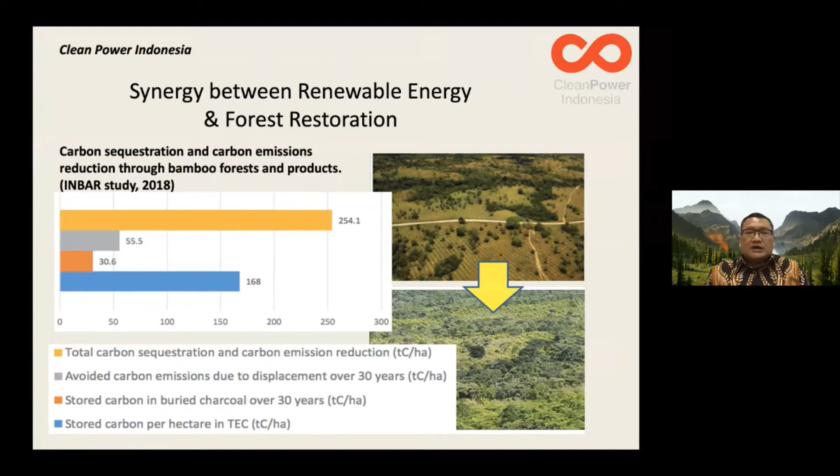And this is also according to an INBAR study back in 2018 - when we reforest the area and use it for energy, this system will sequester more carbon in the long run. So this is going to be a very powerful solution for Indonesia, as Indonesia has a large area that is deforested and degraded, and we just received the payment from Norway as a REDD plus payment - Norway committed $1 billion for Indonesia to restore degraded and deforested areas. So this is an opportunity to be a REDD plus project in the future.

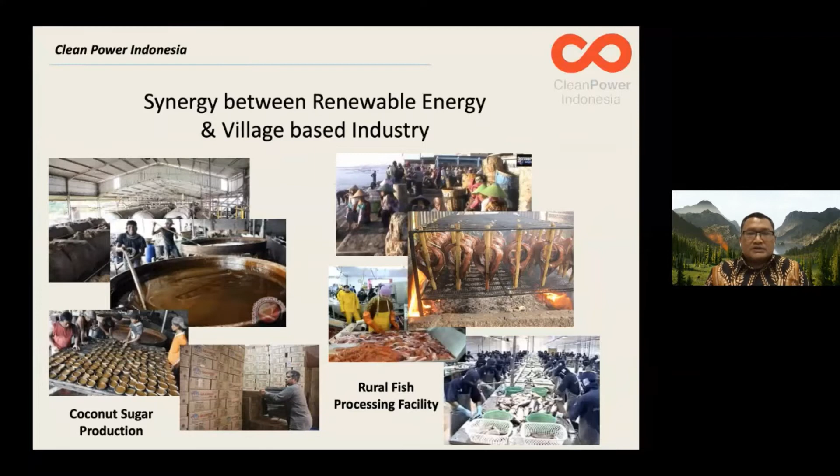And obviously, with reliable power, the community can develop not only lighting, but also coconut sugar production and rural fish processing facilities. This opportunity is enormous, it's unlimited. The community can grow the economy, especially in the pandemic era where we need communities to rely on themselves - this is the way to do it.

PLN, as the state-owned utility company, also likes the idea, obviously, because they save money. In this particular case, based on a simulation of 2.2 megawatts, they will save a lot of money, like 16.2 billion rupiah per year - that's probably around 1 to 1.5 million dollars per year.

And the country also saves money on subsidies, and because 70% of our diesel fuel is imported, we also save foreign currency by switching from diesel fuel generated power to biomass.

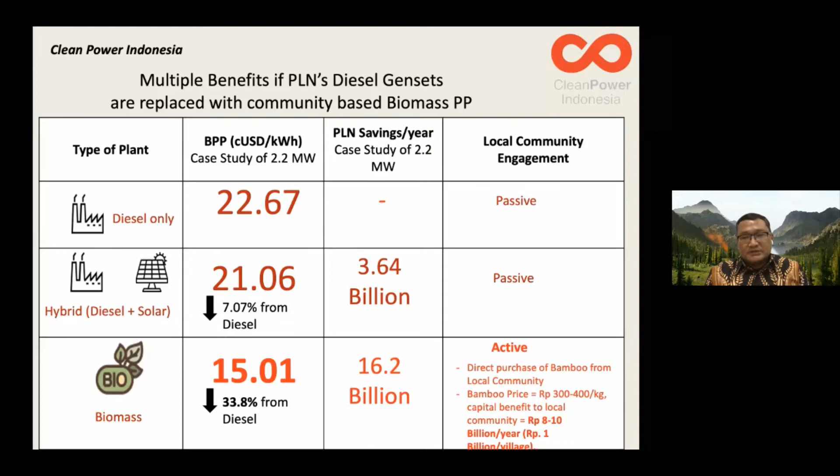On the plus side, the community is now becoming more active with this program. With diesel or hybrid diesel and solar PV, they're not part of the solution - they're just the passive receiver of the power plant. But with biomass, they are a more active participant and they receive money from selling the biomass.

So what is the potential? I mentioned in the beginning of the presentation that we have 9,000 islands representing around 50,000 villages all over the country that still do not have reliable and equitable access to electricity. That's a lot of villages that need to be electrified. Not only that, we also alleviate poverty because with electricity available 24/7, they can develop their community much better. And the 20 million hectares of degraded and marginalized land all over Indonesia need to be restored, which can be carbon sequestration as well.

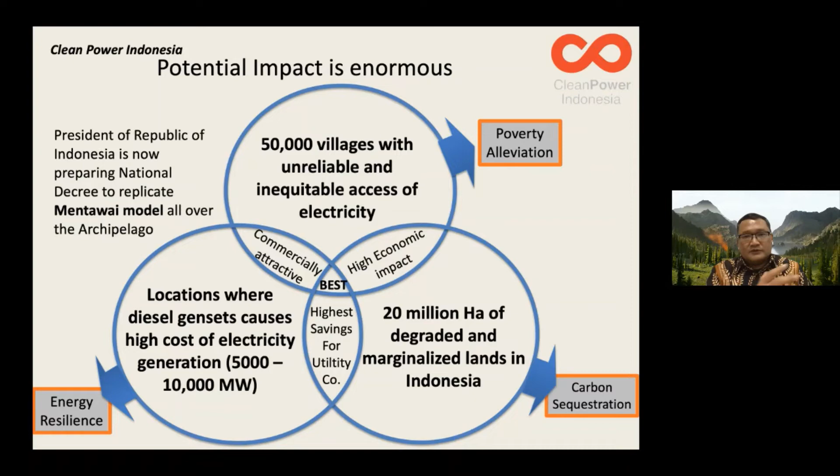Finally, we also want to rely on renewable energy, and we have about 5,000 to 10,000 megawatts of diesel gensets that can be replaced by this system. So the impact is not only for the energy transition, but also for poverty alleviation and carbon sequestration, all in one project.

The government has adopted this as a best practice. Now is the time to replicate. This is the last slide. What I want to reiterate here is this.

Countries all over the world are worried about economic recession because of COVID-19. Countries all over the world, especially developing countries like Indonesia, need to create jobs urgently. We cannot wait for 1 year, 2 years - we have to create jobs right away. Planting bamboo and switching from diesel gensets to biomass creates jobs instantly, not only on big islands but also on small islands in remote areas all over Indonesia. So this is the way to create jobs very fast.

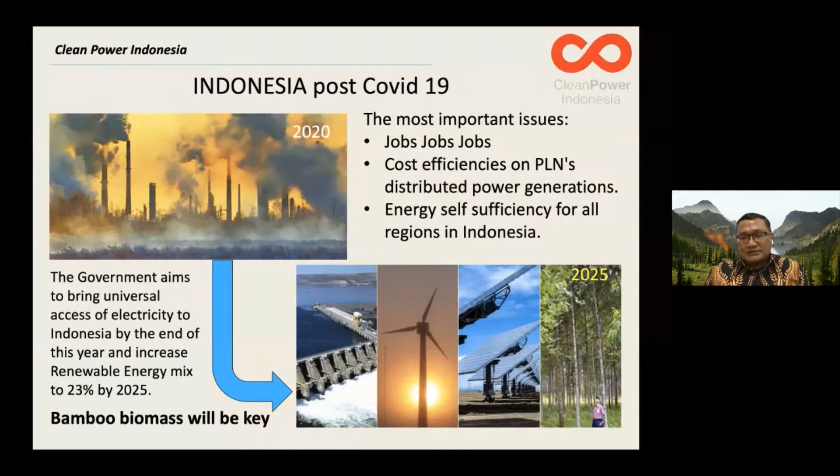Okay, thank you, Jaya, for your great presentation. I think your presentation and model have shown that farmers don't only produce food - farmers can also produce energy. So farmers can capture the market for food as well as the energy market. It's a great presentation, and we would like to see the same model replicated in small island states and in countries where they don't have access to electricity. It can provide employment to communities and farmers, and it will also benefit the environment on a huge scale. It's an interesting case study.

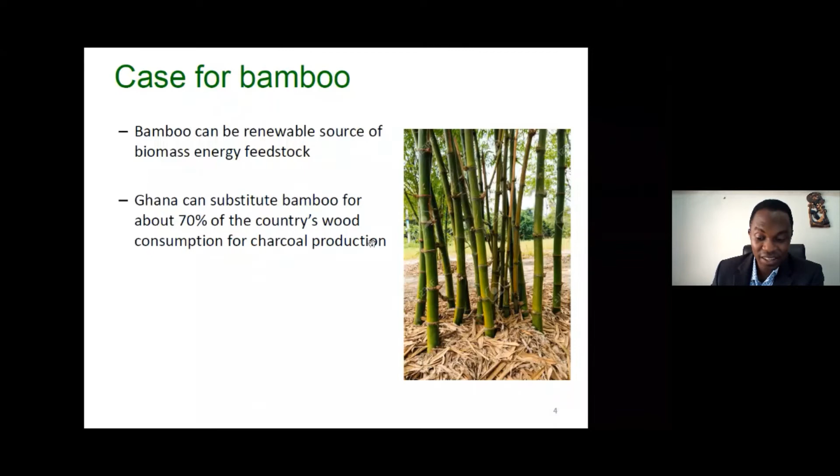Now let's talk about bamboo charcoal. The practice of producing charcoal from bamboo is not new. China has a very long history and presently produces several thousand tons of bamboo charcoal every year. Bamboo charcoal compares quite favorably with charcoal made from conventional wood. Yield rates of between 20 to 30% have been recorded for bamboo charcoal, which is comparable to acacia. The calorific value is also comparable to acacia.

I keep comparing to acacia because in Ghana and many African countries, acacia has become one of the main species being planted for the purpose of biomass energy. In comparison to conventional wood charcoal, bamboo charcoal is known to have higher absorption capacity, which makes it preferable if you want to use the charcoal as a cleaning agent for purification. A study published by Partey et al. in 2017 indicated that it is actually greener to produce charcoal from bamboo than to produce charcoal from acacia and teak.

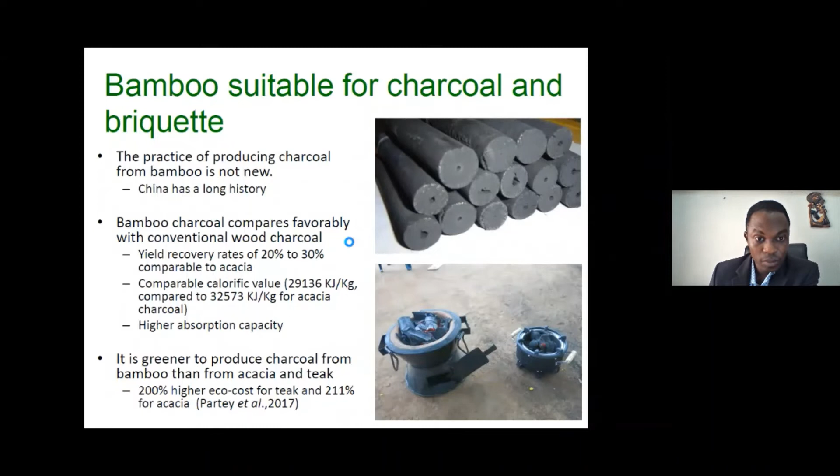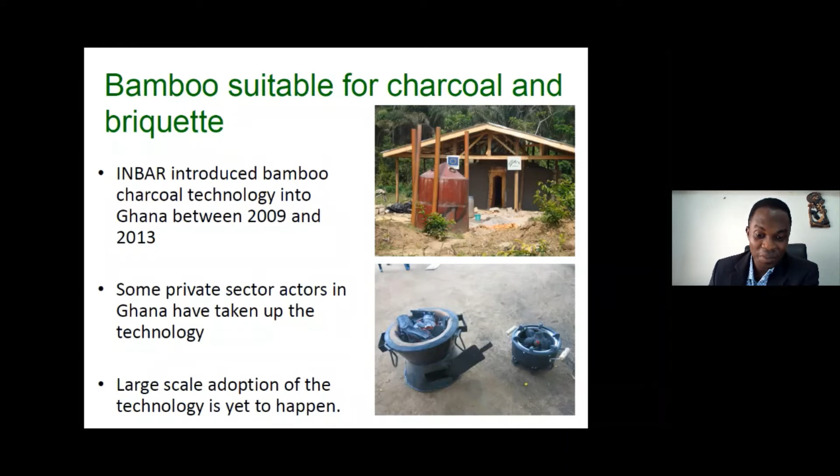INBAR introduced the technology for producing charcoal from bamboo into Ghana through a project implemented in Ghana and Ethiopia between 2009 and 2013. Since the technology was introduced into Ghana, some private sector actors have taken up the technology and are producing bamboo charcoal. But at the moment, we are yet to have wide-scale adoption of the technology. So it's important to understand what has been done so far in Ghana and what needs to be done to achieve a wider application of the bamboo charcoal technology.

I'm going to briefly share 3 cases of bamboo charcoal production in Ghana. The first case is Ankobra Farms Limited, a branch of a beach resort in Ghana's western region. The beach resort has farms basically into organic farming, but as one of the things they do, they also produce bamboo charcoal from natural stock of bamboo in the vicinity of the resort. They also produce vinegar, the distillate from the carbonization, which they use back on the organic farm for pest control. This farm is using a high efficiency, low emission retort kiln.

I understand that is the most efficient kiln for carbonizing charcoal, but the investment requirement is much higher if you use this kind of kiln. At the moment, the farm is only producing bamboo charcoal on pilot scale to test the kiln, but also to test the market for bamboo charcoal. The intention is to sell the bamboo charcoal within the West African sub-region as solid biofuel, but also as biochar, with a target to produce 330 tons every year. The farm sees very good potential for commercialization of bamboo charcoal in Ghana.